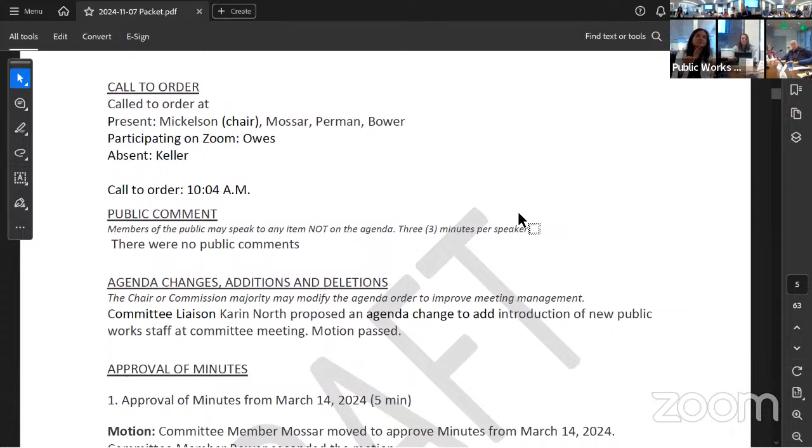Then we turn to the approval of minutes of the last meeting. You should have the minutes in front of you. Has everyone had a chance to look at them? Are there questions, comments, or do we need changes? Anna's scrolling to them on the screen too if you want to see them. Just for clarification, we're now doing action minutes, so they're very short and sweet. Any comments or needs for changes before we approve the minutes? May I have a motion to approve the minutes? Motion to approve the minutes. Second. A motion has been made and seconded. All in favor, please say aye. Aye. No opposed.

We turn to old business. Karin, we'll ask you to take that up. I think the next one we're trying to do for old business, we have none. So now we're on the next item.

Unless there was something else. New business - we need to elect the chair and vice chair.

We want to elect a chair. Does anyone wish to make a nomination? Does anyone wish to nominate someone? Can't think of anybody.

We don't know each other well yet, being new. I would ask our experienced members if they want to take a turn at being chair, and if they do, I'll nominate.

Sure, yeah, I'm interested in being chair. The floor is open, and I would like to nominate Catherine as chair. Do you need a second? Yeah. I'll be happy to second. Are there any other people who would like to volunteer or any other further nominations?

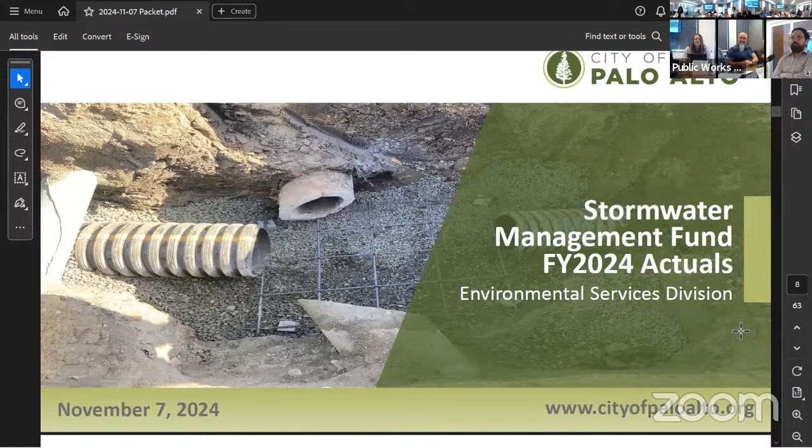All right, so we're now on to the fiscal year 2024 actual. Yes, and our new management analyst, relatively new, Kyle will be taking this on, and Michelle will be here to support and answer, stepping in. So the first thing is we've got the slide.

Many of you probably have already seen this, it's not new. This was included in the video that we asked you guys to watch. We wanted to just remind everybody about the process - it's a year-round process, budget development with many different components. We're doing a lot of coordination throughout the year, working with Michelle and many other people within our group to get it done. I wanted to see if you guys had any questions about budget development and how we do it here at the city.

Why is there community - is there public involvement or public comments? Do they go along that list, or how do you do that?

Yeah, definitely. So public engagement in the budget development process generally happens at the finance committee. Prior to the finance committee budget hearings, they usually do a budget open house, and they'll do an introduction at council. Then they'll start with the introduction at council of the budget, and then they'll have the finance committee budget hearings in April. At any committee meetings, members of the public are welcome to come make public comment on any item - that's really an engagement process with the community there.

Specifically on the budget, with the community and with the elected council - the finance committee is a council committee, made up of 3 elected members from the city council. That's the public's time to interact with the council members on the committee as well as staff, to ask any questions or provide any input.

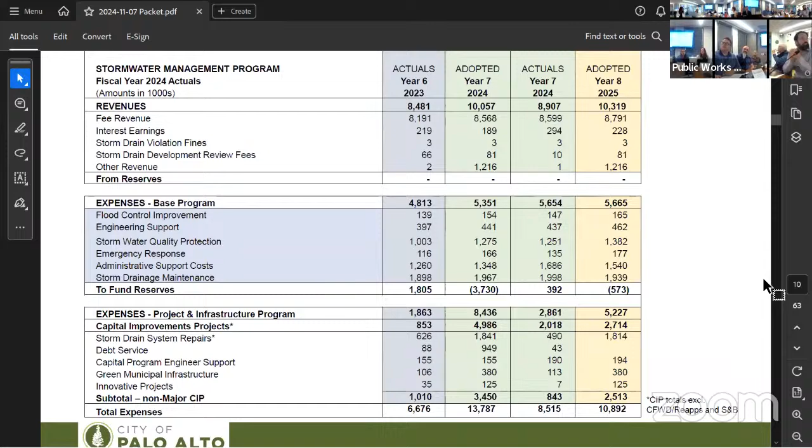As you can see, there are 4 columns. The first column is the 23 actuals, the second column is the 24 adopted budget, the next column is the 24 actuals, and then the 25 adopted budget. Right now, we're not going to go over 26 because that's going to come at a later meeting.

This program is broken out into 3 buckets: revenues, expenses which is the base program, and capital projects. The base program does not sunset - even when the ballot measure ends, this will continue. The capital projects also include the green municipal infrastructure, which is how it's listed, but you'll hear us refer to it as GSI. Essentially they're the same thing, just wanted to point that out.

When looking at the revenue numbers, one item I wanted to highlight is that we earned a little more interest, which is good. The money comes in, we put it in our account, and we earn interest on that money until we spend it. The other piece is storm drain development review fees. You can see we've only taken in, well this worksheet says $10,000, but I checked with the inspector and we've actually billed $78,000. I just wanted to make sure we had that item noted.

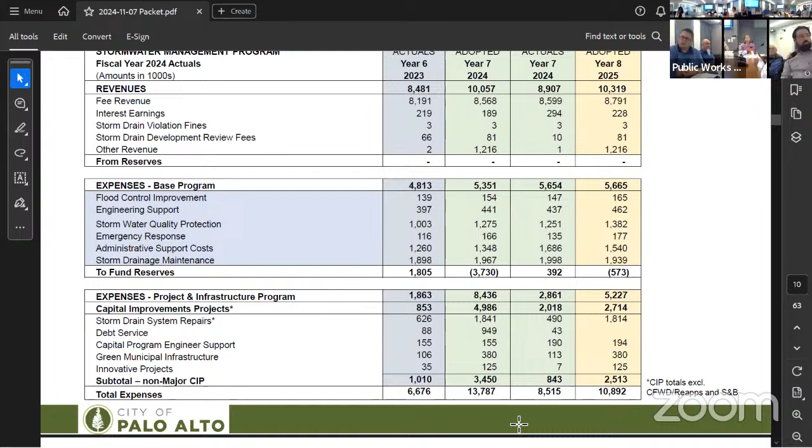That'll come, we do that later I think. Action required. Any other questions on the budget or the budget process before we move on?

I'm sorry about this, but the to fund reserves—those are big numbers with a few symbols—I just wanted a quick explanation. Of course. The way this ballot measure is structured, we are collecting revenues and have 13 large capital projects we have to complete. We kind of have to wait for the reserves to build up to budget those large projects. So you'll see some years where there's a good chunk going to the reserves so we can build up enough to budget in those capital projects.

And when you see it decrease, it's because we budgeted a project that year. So those first few years of this ballot measure, we didn't have any of the 13 capital projects budgeted because we hadn't built up the fund reserves to pay for them. The years you're seeing big amounts going in, we're getting ready to get enough to put a capital project in, and when you see it reduce, it's because we budgeted one of these large projects.

So you'll see a lot of those in the coming years, now that we're probably halfway-ish, maybe a third of the way into the ballot measure. We have the funds to start budgeting those 13 capital projects and start working on them. Thank you. Yeah, of course.

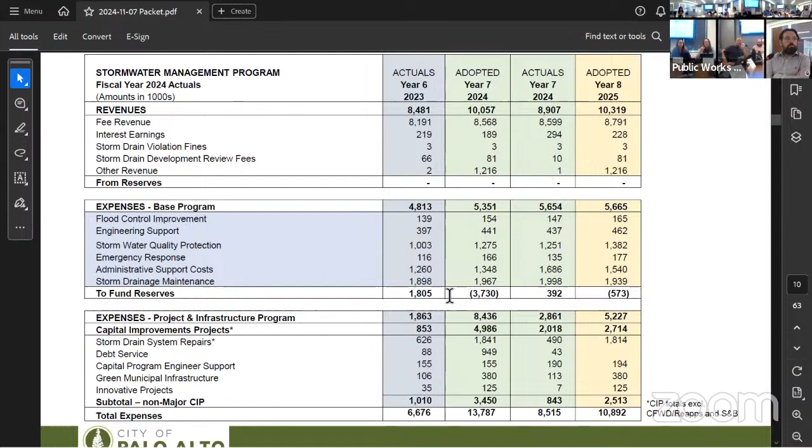So let's move on to trash. Is that okay? If you guys have any additional questions, I know we're on the spot on budget development, please feel free to send me or Kyle an email, and we're happy to answer any questions you have.

Good job, I mean seriously, that was so good. Thank you. So now we're going to have Brad Hunt. He's going to talk about trash.

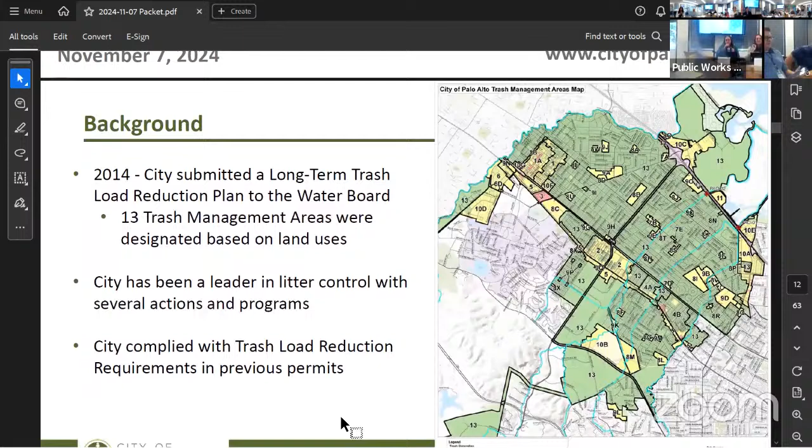Good afternoon, everyone. So today's presentation is going to be on the trash load reduction progress that we've made to date and the steps we're taking to meet our municipal regional permit requirements by June 2025.

To give a little background, especially for the new board members, some of you have seen this presentation before, but we'll provide background. The regional board established requirements for the city to follow to protect stormwater quality under our regulatory permit, the municipal regional permit, most recently approved in 2022. In 2014, we submitted a long-term trash load reduction plan to the water board, which has 13 trash management areas throughout the city, shown on this slide.

All those numbers represent the 13 different areas. The colors on the slide: green represents low trash load, yellow represents medium, red, as you can see, very little on there, represents high trash load, and purple, mostly Caltrans right of way, means very high trash load. So we're required to treat all of those areas and make sure we have very low trash production in the city.

We've been a leader throughout the Bay Area in litter control. We have several actions and programs implemented over the years, which I'll go over in another slide. Basically, we complied with all of our trash load reduction requirements in all the previous permits to date, meeting every trash load requirement and every percentage.

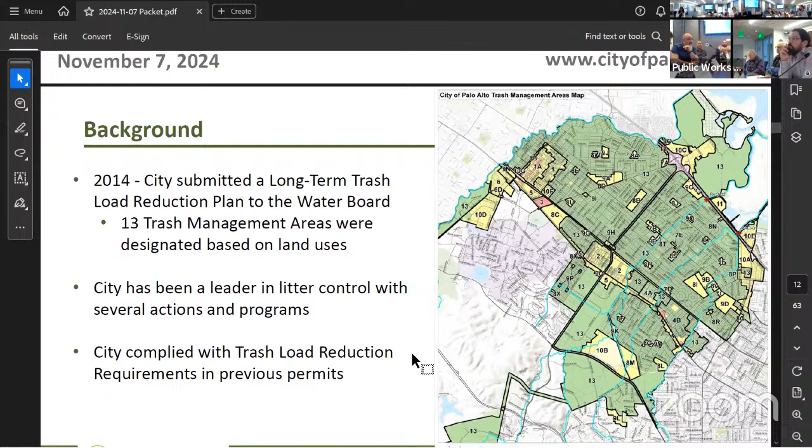So the reductions, sorry, next slide. Our trash reduction requirements in the new stormwater permit are based compared to a 2014 baseline. We had to achieve 90% by June 30th of 2023, which unfortunately we did not meet - we were at 75%. Part of the reason was that we lost some credit for the ordinances we passed, the single-use ban for bags and for EPS. We lost the credit for those, which dropped us below where we were.

What we have to do is achieve 100% by June 30th, 2025. To meet that requirement we submitted an updated long-term trash load reduction plan, which we did. When we did that, it was sent back to us saying we need to provide more detail on exactly what we're going to do to meet this. So we updated that plan, and one of the actions got us to 97%.

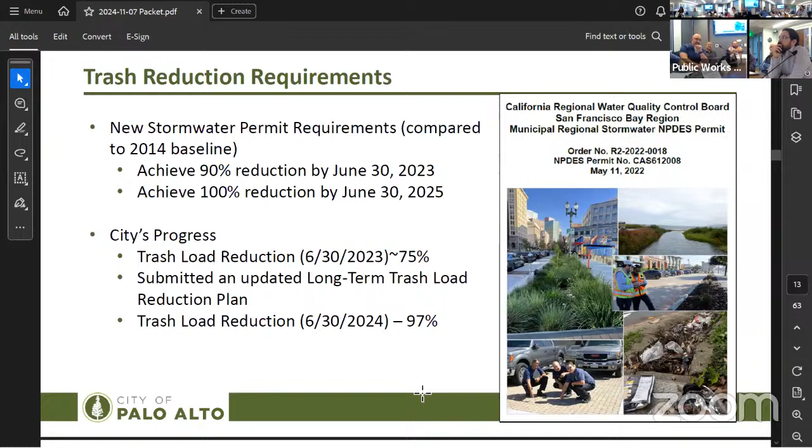Next slide, please. These are our ongoing trash control measures implemented so far: street sweeping throughout the city at various frequencies, on-land cleanups, trash container bin management - every business has a trash container they have to manage, and we inspect that to make sure they keep it clean. Storm drain inlet cleaning - Oscar's group does that, making sure they're cleaning those storm drains every year, getting trash before it gets into the creeks. We also have anti-littering and illegal dumping response, and public education outreach, plus covered load requirements.

Those are the ordinances I was talking about where we lost credit - that was about 10%, I believe, if I remember correctly. We also have trash booms, and we get partial credit for that because it's not technically full trash capture, which is how we get most of our credit. We get partial credit for those because it captures trash as it gets into the creek, but doesn't capture everything. That credit, unfortunately, is also going away at the end of this fiscal year, June 30th, 2025. What we also do is what's called trash assessments.

So we have people go out throughout the city and they assess sections of the city to determine what the trash generation rate is within that area. What we're seeing is that we typically get low or moderate trash generation. That's good because it means we're meeting a lot of requirements just by surveying and saying the city is clean. Those are point-in-time counts or surveys, and they vary year by year. But overall Palo Alto is really clean, and we have actions to take care of those other areas that aren't clean.

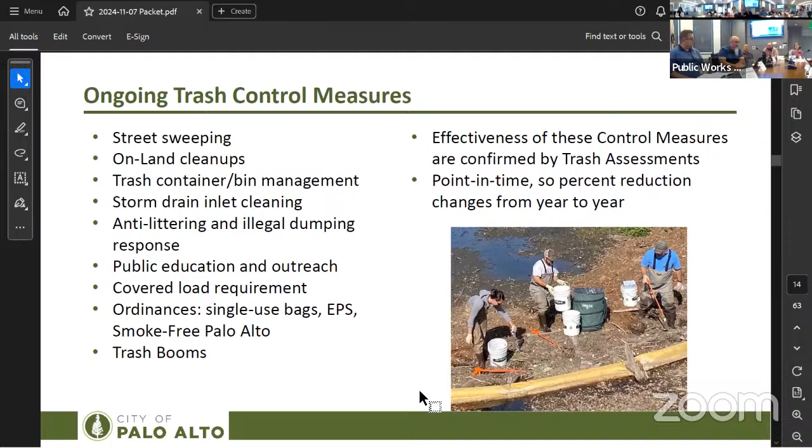Sorry, just one quick question. Could you talk a little bit more about the ordinances that impacted us, the single-use, EPS, and Smoke-Free?

The single-use ban was passed under the zero waste group. Basically, all single-use trash bags, grocery bags, and any type of retail bag were banned within the city—they were not allowed to be provided to anyone. That reduced trash impacts in the creeks. EPS is the same thing: any polystyrene packaging was banned from being sold in retail stores.

What does it mean that because of that ordinance, we lost credit? The regional water board decided that those ordinances were effective but were a one-time thing. They reduced trash overall, so that credit can't be applied going forward, since there's no more trash generated from those items anymore. We could pass an updated ban on something else, but that would also sunset at a certain point. So we did the good deed, got the credit, and now they're saying we have to do more to reduce trash from other sources.

So the ordinances are still in effect. I just want to make sure it's clear—it's just the credit that we get for trash reduction that has been removed.

So now there's street sweeping. You have a contract with street sweepers around here—they were by my house every other week picking up a lot of stuff. I think it would roll into this somehow. It does, we get credit for it. That's part of the trash reduction program. So those street sweepers are picking up trash along the curb and gutter.

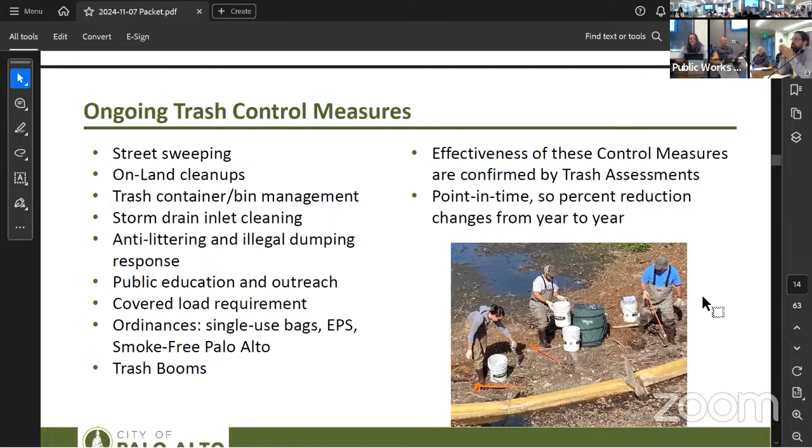With the construction going on, and those guys are horrible, street sweeping becomes almost more important. We have a construction inspector who inspects certain sites, and they're required to have a street sweeper go around during the day at a certain frequency to maintain that. You don't want nails on the street or anything. Yeah, exactly, right.

Bioretention here, that's it. Do we have some place to review the different percentages and credit? There are percentages, I don't have those off the top of my head, but all 3 of those devices right there give us 33% reduction throughout the city. We have that broken out on the spreadsheet that we have.

Some places in the system have bar screens that you have to go in and clean. Correct, we do have them on the pump stations and some creeks, we also have them right before the creek goes underneath the street on open channels. We capture all the trash. We have some photos of that.

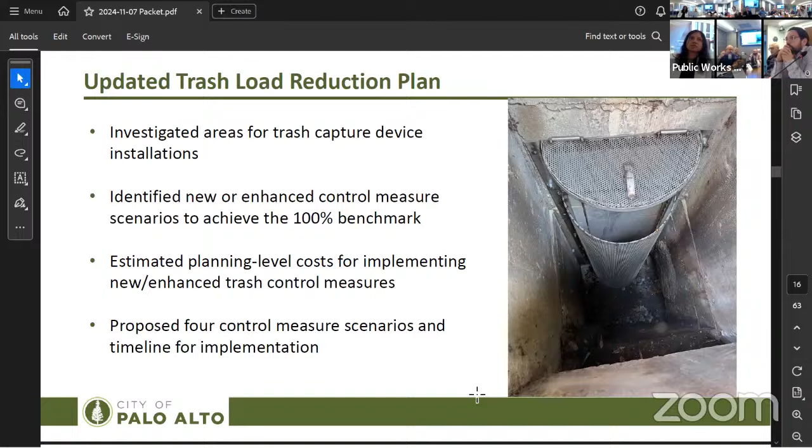So what we did was we looked throughout the city to determine where we could install those smaller trash capture devices. We looked at new ways we could enhance our current measures, like street sweeping, to see how we could achieve that 100% benchmark and maintain our current level of service. We estimated all of our planning costs for what this was going to cost us to do all these things, and we came up with 4 different scenarios.

The cost went down a little bit when we decided to include the trash assessments, then went back up when we decided to do all small devices, which would be a heavy load for someone to maintain, plus the private property inspections. So we decided to go with scenario D, because 49 devices isn't a lot to maintain and it's less costly. Private property inspections we can wrap into some of our current inspection programs so the cost goes down since we're not duplicating effort there, and then going with our normal trash assessments we're already doing throughout the city, those numbers reduce because we're actually doing the private property inspections.

What those private property inspections are is going out and inspecting private properties that actually have a storm drain system directly connected to our system. We need to make sure they're providing or implementing best management practices to reduce trash on those sites so their trash generation is at a low level. We inspected 45 of those this year and they all got A's, meaning they're low trash generating, so we got credit for that. That's how we got up from 75 to 97% reduction.

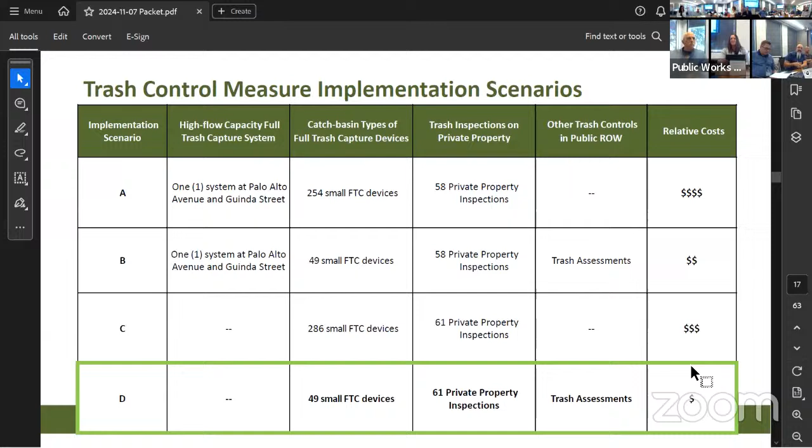So, a lot of them flow straight to the street, so that we can't do.

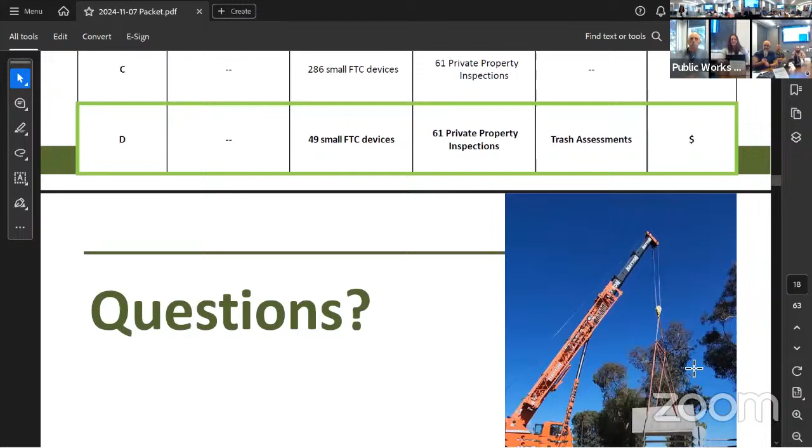So that's basically my presentation. We hit this one too. Oh, am I doing that right after? Are we rolling right into this? Yeah, you're rolling right into the stormwater.

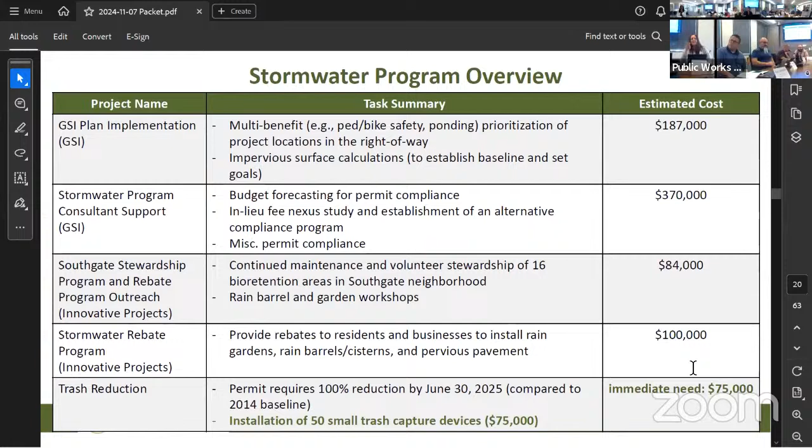So this is alluding to what we talked about earlier, talking about how we're going to meet compliance goals with an existing budget. And so we're trying to be strategic about how we can shift some money around. So now we're talking about fiscal year 25 budget.

Take it away - this is the overview of our stormwater program and the projects that we have within that program. As we talked about, GSI, Green Stormwater Plan Implementation, is about multi-benefit projects. In 2019, we submitted what's called a Green Stormwater Infrastructure Plan to the Water Board, which stated how we would increase GSI throughout the city, and there are various actions we were taking to implement that.

One action is that we created a GSI design handbook for CIP projects, capital improvement projects that we're rolling out. We're at the very final stages of getting that done finally, and it's about to go to design, and then we can provide that to city staff to use for all our CIP projects.

Another one is that we're integrating GSI into departmental work plans. We're looking at city projects to also make sure we include it in, and we're working on prioritizing GSI, especially in the right-of-way projects, and coordinating with the other departments on that.

Impervious surface calculation is another project we have under that plan implementation. We're going to basically survey all the impervious area within the city and determine where the best areas are to implement GSI, to install green stormwater infrastructure to treat those areas.

Stormwater program consultant support also falls under this GSI category, and what we need support for is to help forecast the long-term budget. For the rest of this permit through 2027, one thing we need to do for private projects is conduct an in-lieu fee nexus study, because they're having trouble meeting some of the requirements. So they need a way that they can pay an in-lieu fee so that we can use that money to install GSI in other parts of the city to treat stormwater.

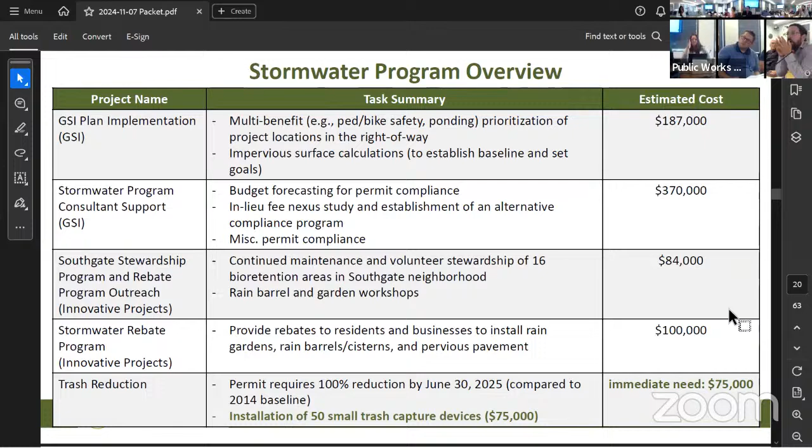So we're going to request an immediate need for a certain amount of money. Just so you know, the estimated cost is not for fiscal year 25 specifically, that's the contracting need, it will go over multiple years. So we're just going to show you what we need for the current fiscal year 25.

I just have one comment, I think that this kind of program would be important to people. I don't know enough, I don't think a lot of people living here understand this is going on. And we need more PR or whatever on this kind of program, because it really makes a difference to those of us living in the city, and I don't think there's a lot of people that know, but personally...

That's why we do a lot of PR, but you guys being the ambassadors is going to help us, because boots on the ground talking to folks, the area in Southgate has gotten a lot of publicity because the residents are involved, and that helps. So that's where you guys can assist us. But this is our budget needs, Kyle.

Yeah, so hopefully this will be pretty quick. As Brad said, in order to meet our permit requirement, we need to install 50 new trash capture devices. And we've identified some budget from fiscal year 25 that we'd like to use in order to install those 50 trash capture devices. So that's one of the action items we're going to be asking the committee to take, is to look at this and go ahead and sign off on it.

And it kind of goes back to when we were looking at the fiscal year 24 budgets. If you remember, we identified that the GSI budget and the innovative project budget are two areas where we're spending less. And so we're hoping to use budget from the GSI budget category and the innovative projects to install these 50 trash capture devices.

Are we done with that action item now? Yes. Okay, excellent. Now we're gonna move to the next item. Next item is number 8, staff overview of winter preparedness. Is that correct? Yes. So Mike has a lot of slides because it's a lot of pictures. It's nice for you guys to see.

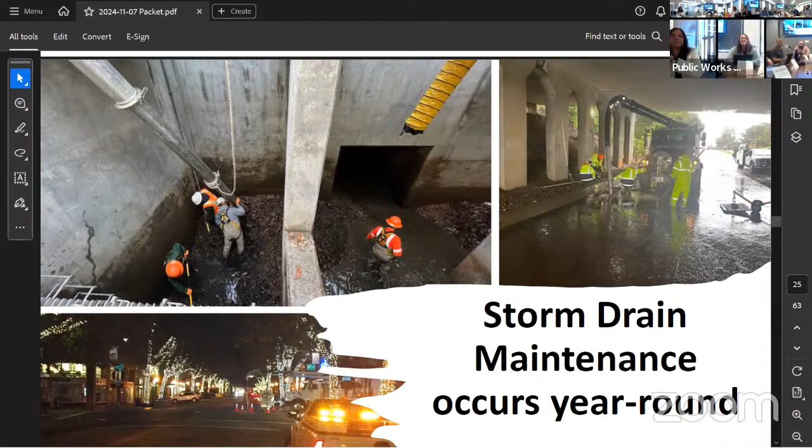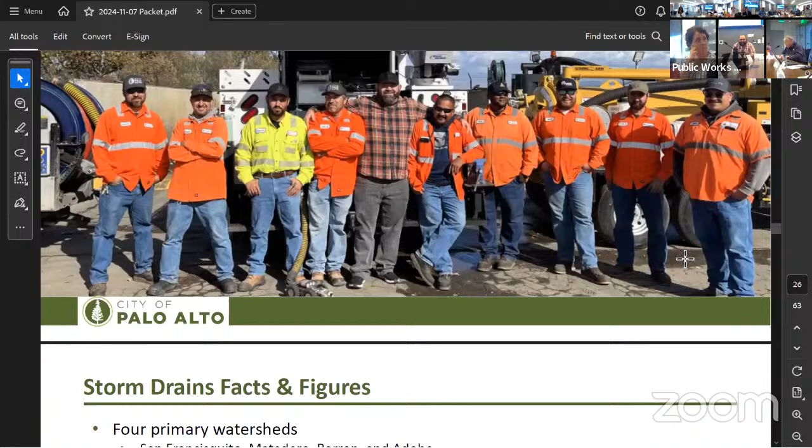So we're gonna talk about what public services does to prepare for winter. We actually prepare for winter all year long, and we should be preparing for winter before winter. That's actually when we get most of our work done. That's why I always laugh when people say, what do you do to prepare for winter? And the thing is, during winter...

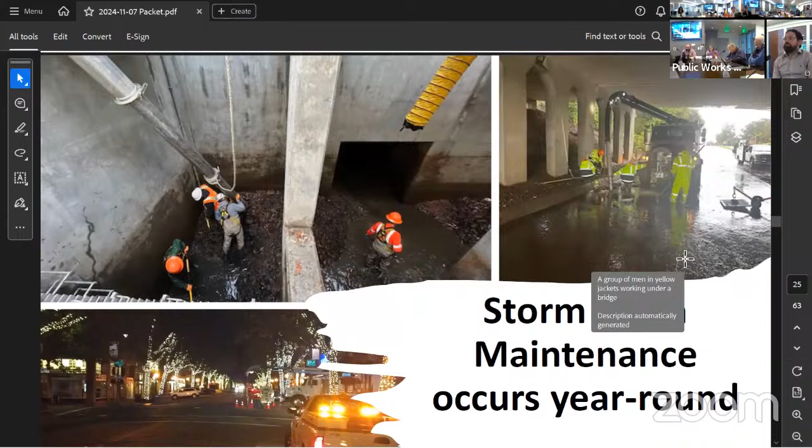This is most of our team that works on what you guys are providing oversight on. The team actually gets larger because when we need to, we pull from other crews. During the flood 2 years ago, we actually pulled from everywhere in the city - every employee from our public works team, public services team, public works department, utilities department, parks department, everywhere, plus contractors. We had an army of people out. So we have a lot of resources at our disposal.

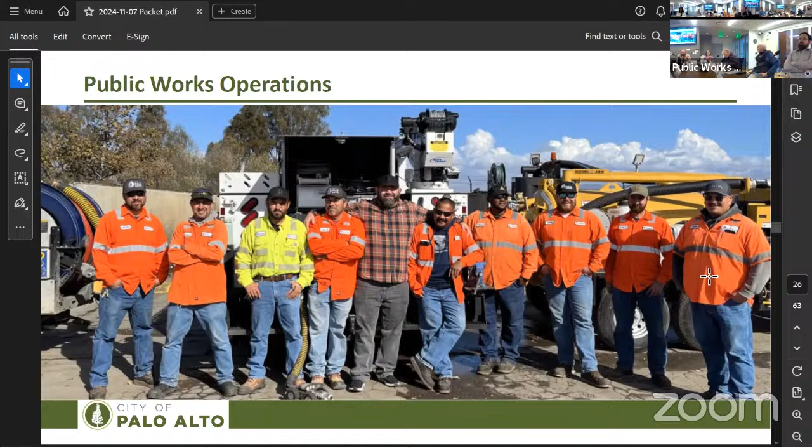Some storm drain facts and figures for the new people: we have 4 primary watersheds, listed there. Many people don't realize storm drains are separate from sanitary sewers. The stormwater actually flows to the creeks and the San Francisco Bay without treatment. We have 107 miles of underground pipelines, 76 outfalls, 4,662 catch basins - which we all inspect, maintain, repair, and work on - 1,592 manholes, 9 stormwater pump stations with two new ones coming, 2 new trench drains related to traffic calming projects, and probably over 20 green stormwater infrastructure sites.

What is a traffic calming project? What does that mean? Oh, those are the things that a lot of people tend to not like - instead of going straight through a four-way intersection, you have to go around something in the middle. They're sort of roundabouts, but not really roundabouts, and they also have stop signs, so they're not really roundabouts either. They're supposed to be traffic calming. I don't know if they're stress calming.

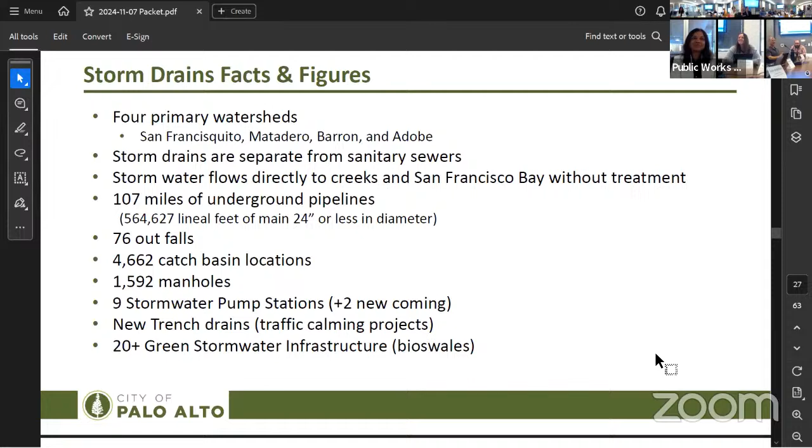Sometimes you see what I mean, at the intersection, not just the intersection, but at the ramps where they bulb out. Yeah, there's a bulb out. Okay, all right, next slide, you got it already?

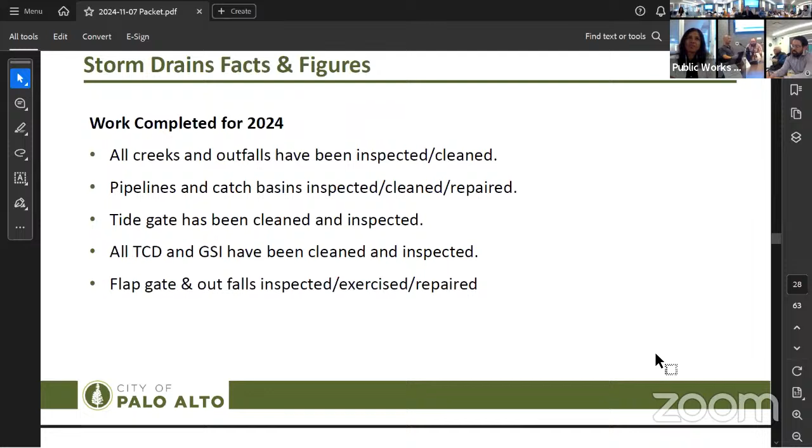Here's some of the general work we've already completed for the year. All the creeks and outfalls have been inspected and cleaned. The pipelines and catch basins have been cleaned, inspected and repaired as well. Our tide gate has been cleaned and inspected. GSI has been looked at and inspected, and the flap gates and outfalls too - it's important to not just inspect them but exercise them to make sure they're working, and repair them as necessary. There are nine pump stations, with two more coming.

Are these all manually inspected, or are there some cameras or other tech used? Manual. Any plans to automate some of these, like putting cameras maybe even inside the drains to get some data? That would involve some of the logistics of trying to put in infrastructure. We have some infrastructure to do creek monitoring and things like that, but to try and put in permanent infrastructure to monitor how the storm drains are functioning...

We do it within the sewage treatment plant, and we have 24/7 operations, a lot for maintaining it, running lines, always troubleshooting. Right now it's seasonal - his team typically goes out and inspects, and they know the hotspot areas. The two pump stations Michelle's working on will also help with those areas where flooding happens, so we have a good sense of where we have issues in the city. With construction going on, big buildings and all that, they end up with their own pump stations inside the building, and that's what I'm seeing - they need to maintain them, which they don't do, so the system keeps getting more complex.

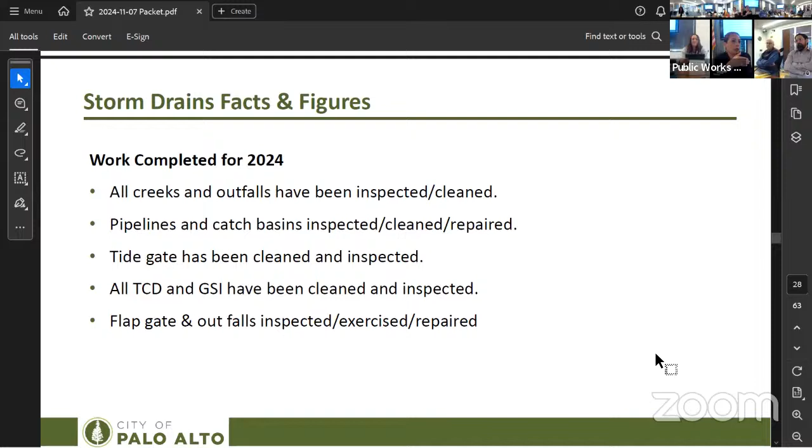That's private property - anything in private development, private property, is privately maintained by whoever, whether a resident or a campus. It's not something we would maintain, though it flows into our system. What we have is barriers and separations between what can and cannot flow into our system. Ideally, we'd have catch basins at the street that keep our flows captured, and then we try to separate any private development independent, outside of that.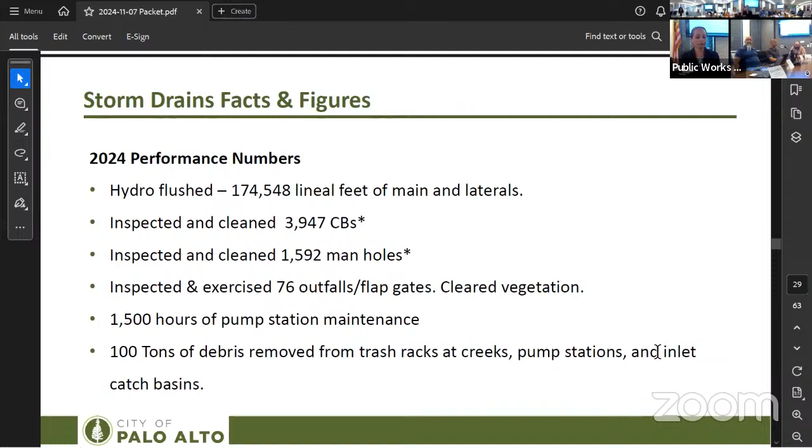Here's some actual performance numbers for the year. We've hydro flushed 175,000 linear feet of storm drain line and laterals. We've inspected close to 4,000 catch basins - there's an asterisk there because we don't just inspect and clean them one time, we go back and do it again, sometimes two to three times. As winter approaches, we'll go back and do it again.

There's a number of outfalls and flap gates that we've inspected and exercised, 76 of them. We spent about 1,500 hours of maintenance on our pump stations, and we probably pulled out around 100 tons of debris just from our trash racks at the creeks, pump stations, and catch basins. That's an approximation - we measure it by truckloads since we have to pay for it, so there's an accounting, but it's not an exact number.

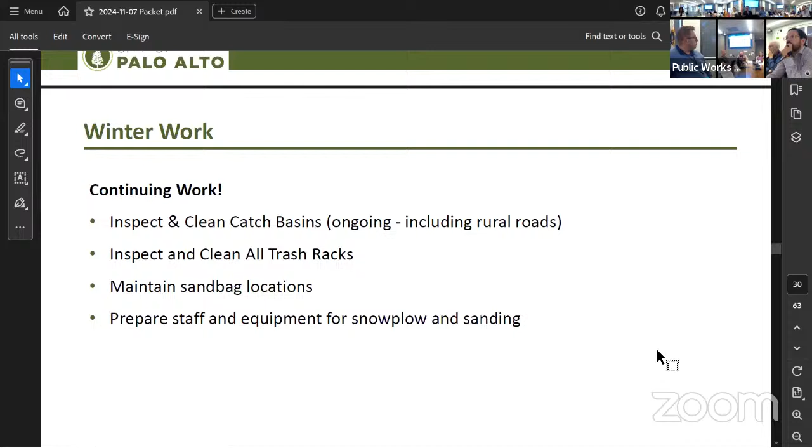Next slide, please. As winter approaches, we're going to continue our work inspecting and cleaning the same catch basins, focusing more on the rural roads up Upper Page Mill, and keep cleaning and inspecting the trash racks. November 15th is approaching, so that's when we set out our sandbag station - we just received our delivery of sandbags and sand, and we'll be maintaining those stations. We also prepare staff and equipment for snow plow and sanding because it does snow up Upper Page Mill, like we did last year.

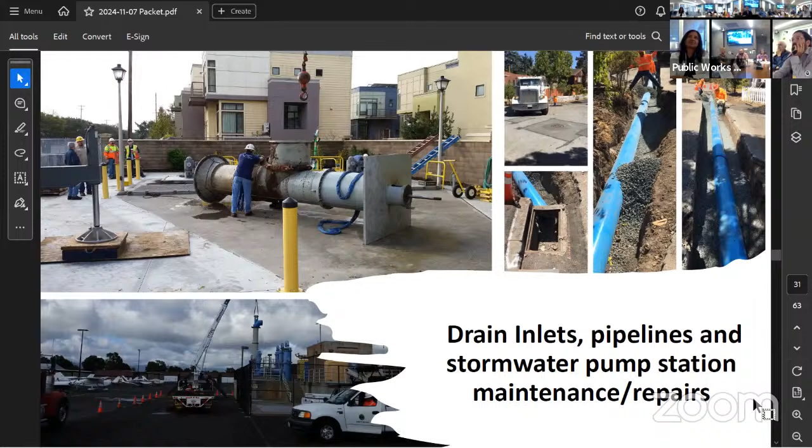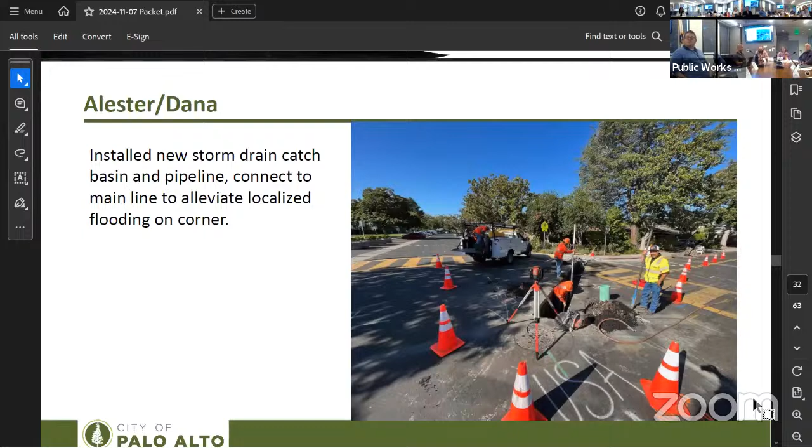Next slide. I want to share some pictures of work that's been going on in the streets. At Alester and Dana, Oscar's crew installed in-house a new storm drain catch basin, at the recommendation of Public Works Engineering, to help alleviate some of the local flooding that happened on that corner two years ago. Over at Palo Alto Avenue and Seneca, the 2022 flood sheared off the flap gate and damaged 10 feet of pipeline there. We had to demo the damaged pipeline and install a new pipeline and new flap gate, and after that was done, we had to restore the vegetation on the hillside with soil and native vegetation.

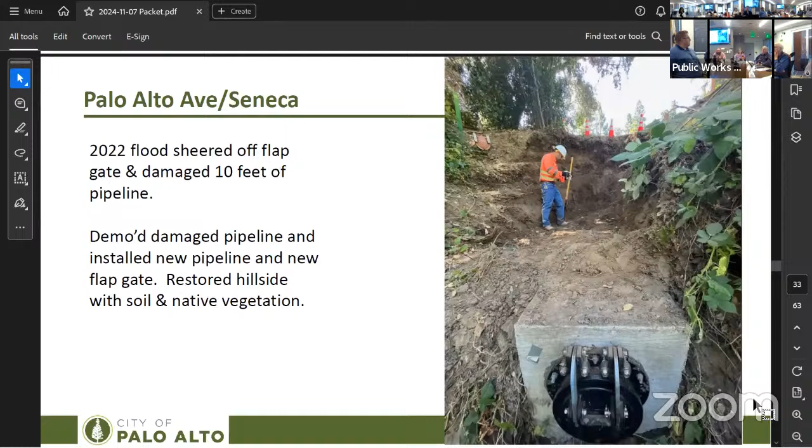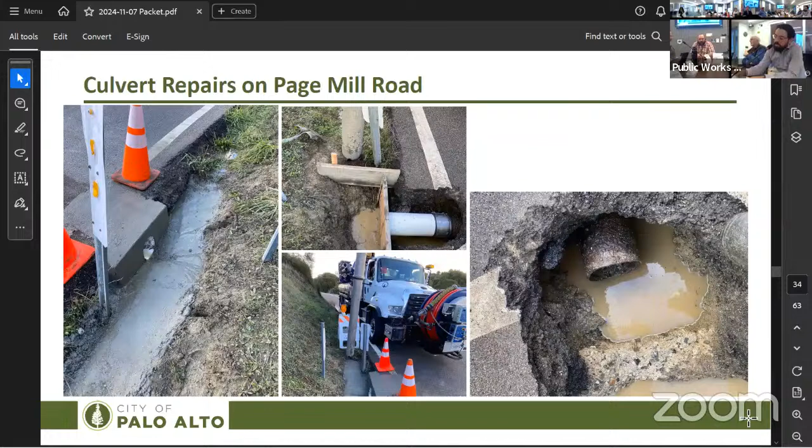Okay, this slide shows some of the culvert repairs that we've done on Upper Page Mill Road. You recognize what this location is? Underpass.

El Camino underpass. Remember when it flooded and we had to close it down with all the mud and debris? Yeah, well, that's actually not our jurisdiction, but to keep Palo Alto moving, we had to step in. Just a little aside, I'll be real quick.

It used to be a 20-year design life, you know, you use a 20-year storm and all that to design runoff. We're starting to see 100-year storms. Yeah, right. I just wonder if that criteria has changed, because the effect is, you're still dealing with a 20-year storm and it always is bigger than that. Just out of curiosity.

So what's the question? Is it design, that's design, for Michelle. You know, a 20-year storm or 50-year storm, did we start to change that criteria? That's what I'm asking. No, we have not changed the criteria. The criteria has been the 10-year storm. You're at a 10-year storm. So we're trying, with the 13 CIPs, just to meet the 10-year storm.

We should have it every year, but we're trying to provide some level of redundancy. So, you'll see in another slide.

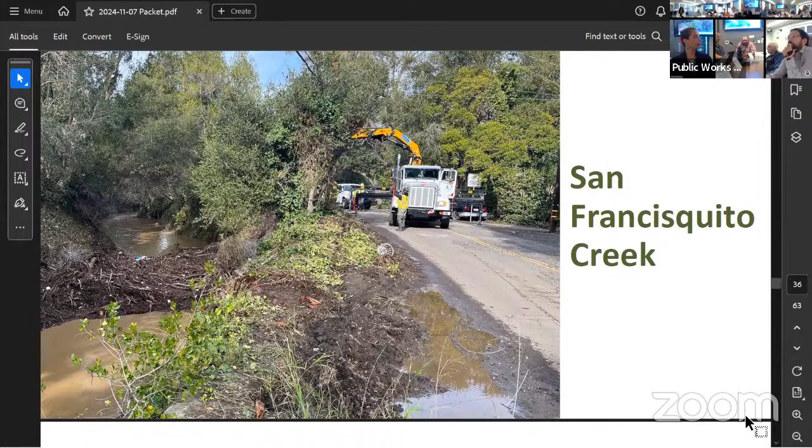Okay, so this picture shows how much debris collects in some areas of the creeks. This particular area was very difficult to get to because of the low hanging utility lines above. We didn't have the equipment to reach that and pull it out, and we couldn't even rent the equipment. So we had to request assistance from Valley Water. They have a very specialized truck specifically designed to do that. So we do rely on our partner agencies to help us. They're a tremendous help.

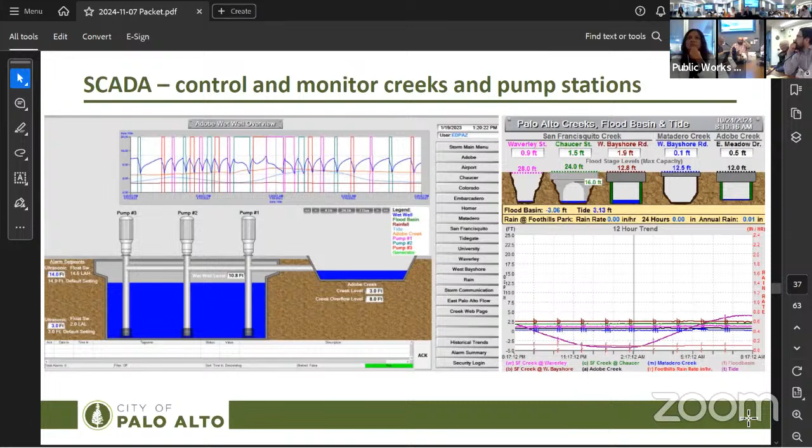Also, I know committee members are aware this is available on the city website. You all know — the one on the right is actually from the city website.

Next slide, please. And just this past year, we made some improvements at Pope Chaucer Bridge by installing a new high resolution pan tilt zoom video camera to monitor the bridge, the activity there, water levels, and how much debris is coming down the creek.

We also added new emergency lighting so we could see the debris flow coming toward the bridge, because when we need to pick debris off the bridge, the person operating the excavator has to be able to time and see the debris floating down to pick it up.

It was funny because 2 years ago when it was happening, all the community members were out there watching. It was like watching a little kid play a video game.

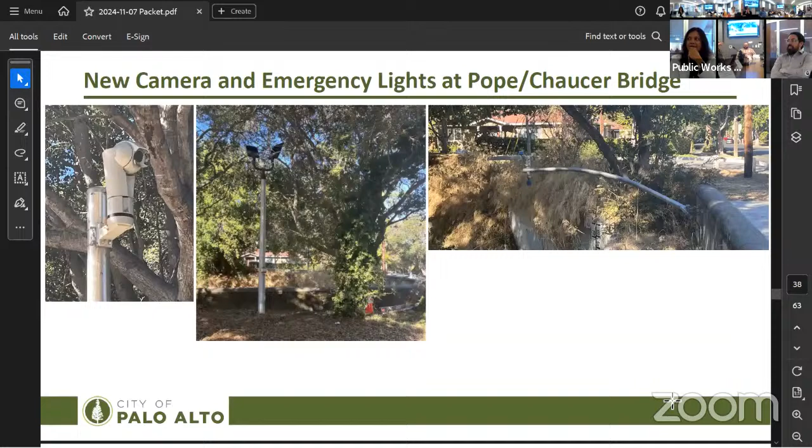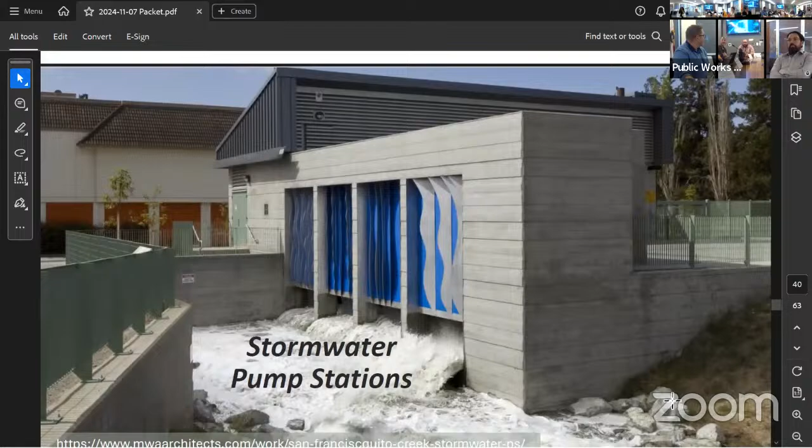There's also, the picture on the — two slides previous — the one on the far right is actually the sensor over the bridge that measures the water level, but there's also a light there that we put so we could light up the vertical height scale that measures the water level you see.

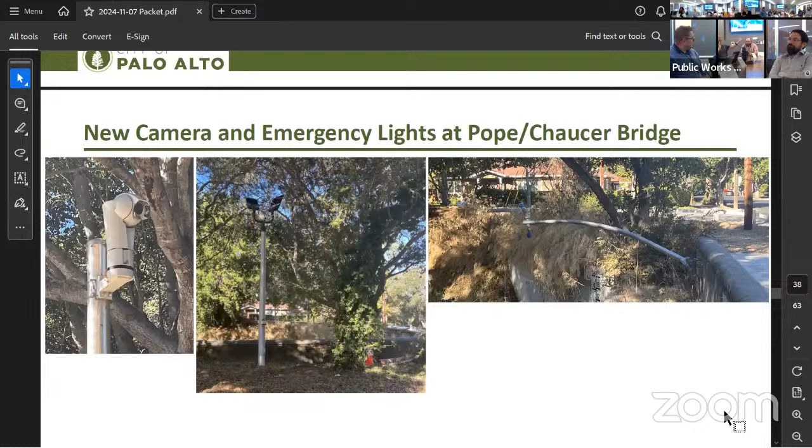We actually had to add another one. The vertical height scale that was there before was on the Palo Alto side, which the Menlo Park side could read. But when we put the camera in, they wouldn't allow us to put it on the Menlo Park side, so we had to put it on the Palo Alto side, which meant I had to put another scale on the opposite side of the camera — a system of mirrors.

We knew how critical people would be, so when we put the other height scale, we made sure we lined it up with the other one. If it was an inch off, we would hear about it. All right, next slide.

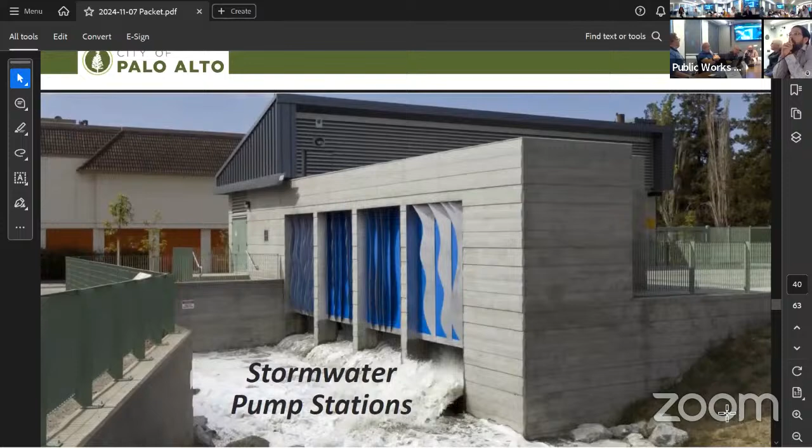Before you leave the slide, I wanted to go back to the comment about making something automated. We have a great relationship with Menlo Park. It's not that they wouldn't let us put a camera on their side, but the dark fiber that serves stormwater is separate from the rest of the fiber that serves the community, and it's connected on this side of the creek. So we had to extend the fiber to this area to get that feedback, and we had to keep it on the Palo Alto side because that way we control it and monitor it. We don't prevent East Palo Alto or Menlo Park from doing anything else. We also pulled the power from our side, so it's more convenient to put it on our side.

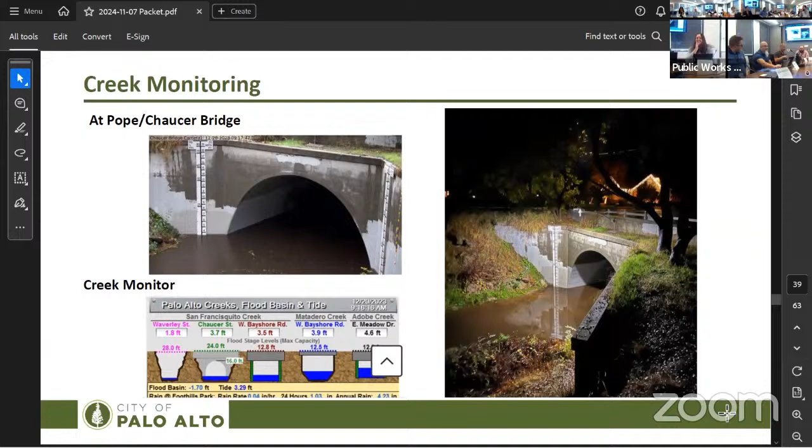The next few pictures are just a few photos of our pump stations and the work going on there, cleaning up all the leaves, sediment, and trash.

Where is this pump station? It's the San Francisquito Creek Pump Station, on East Bayshore, borderline with East Palo Alto.

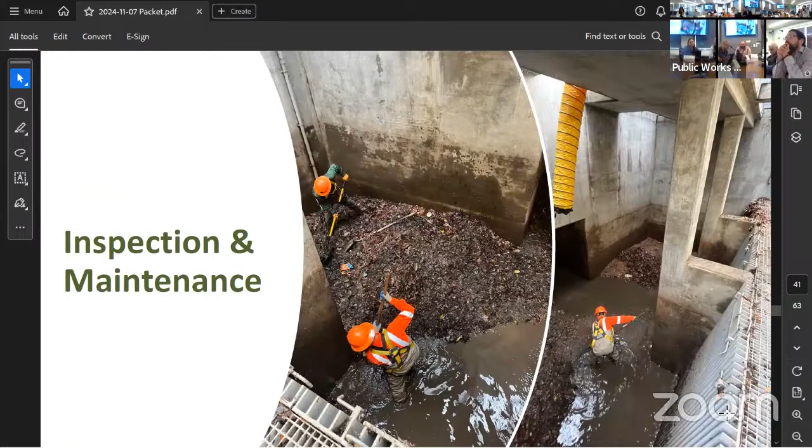I'm just curious. So these are confined spaces, so we have to do confined space training and proper setup.

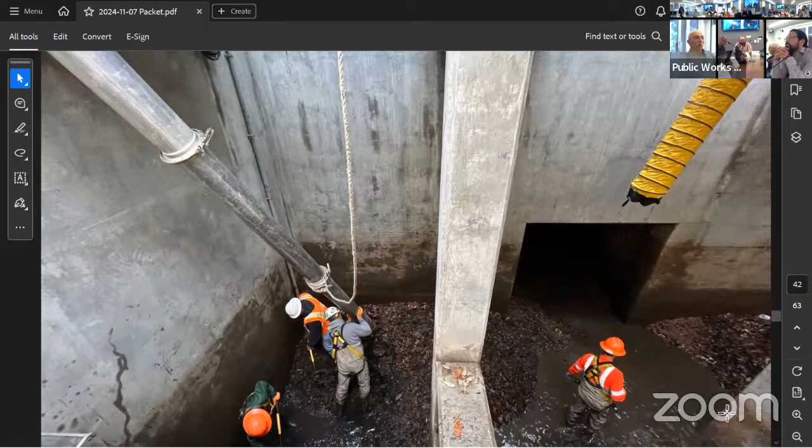If you guys want to visit that site, let me know. There's a few pump stations that Oscar could take you around and show you, including a trash capture site, if you want to see that.

Someone asked earlier about cleaning manually. Yes, but you have to sign something saying if you fall in, it's your fault.

It is cleaned manually, but we do have some specialized heavy equipment to help us. You can see that big metal pipe there with the pipe extensions on it. That's actually a big vacuum, very powerful. It can suck up rocks, it can suck up humans. That's why you have to be careful.

Well, it's about your weight. That's what I'm saying, it's dangerous, you have to be very careful. He prevented me from asking a question. This tool is very valuable to us.

Next slide, some more pictures of trash racks, inspections, and cleaning. This is some of the manual work at the creeks. We have 10 other creeks and 4 channels with trash racks, in addition to those 9 pump stations.

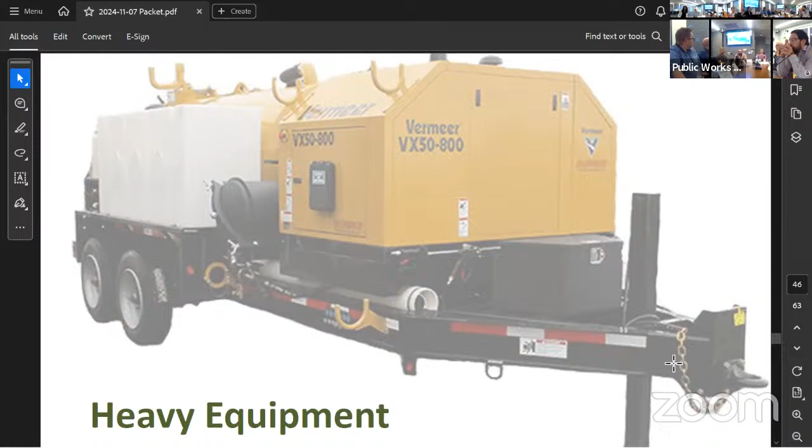Next slide, and this is just to show how valuable the equipment is that we need. This is that Vector truck I talked about, that very powerful vacuum. It also has a hydro flusher on it, so we can clear lines if there's a blockage.

Oh, sorry, the one that says Vermeer - do we own this? No, okay, somebody changed the spelling on my slide. Anyway, that's the Vector truck, we own that. That's a very useful tool.

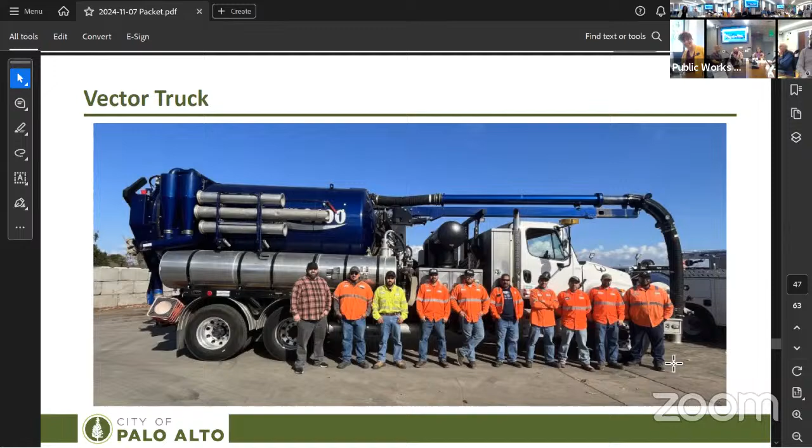What we have found useful, since the 2022 flood, is renting an excavator and leaving it parked at the Pope Chaucer Bridge so we can respond faster. We do have a small excavator ourselves, but it's too small and doesn't have enough reach to get down as far as we want. So we rent one and stage it at Pope Chaucer Bridge, usually around November. It should be coming soon, and it saves us a lot of response time because we just park it there.

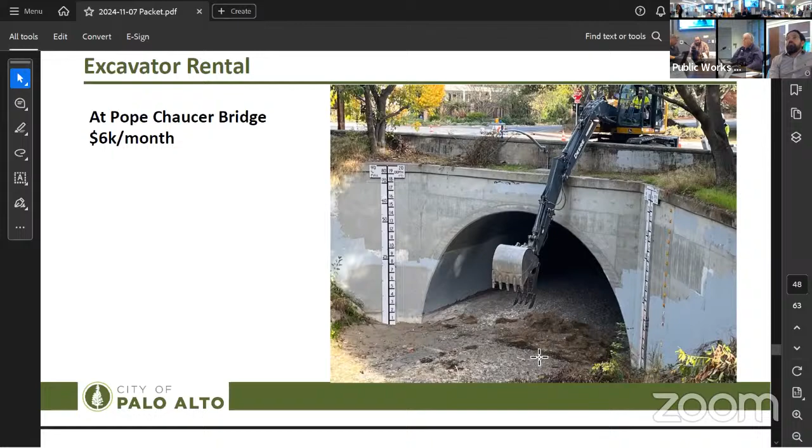This is something we started using about a year ago and are finding very useful. It's also a vacuum truck, but it's a smaller unit on a trailer, so it gives us more flexibility and portability, and extra capacity to do more cleaning, and do it faster. It also allows us to get into smaller areas like parking garages.

And you can respond fast with it too. This is costing us $5,000 a month to rent, and Oscar has found that it's making his operation so efficient that we're actually proposing to buy one.

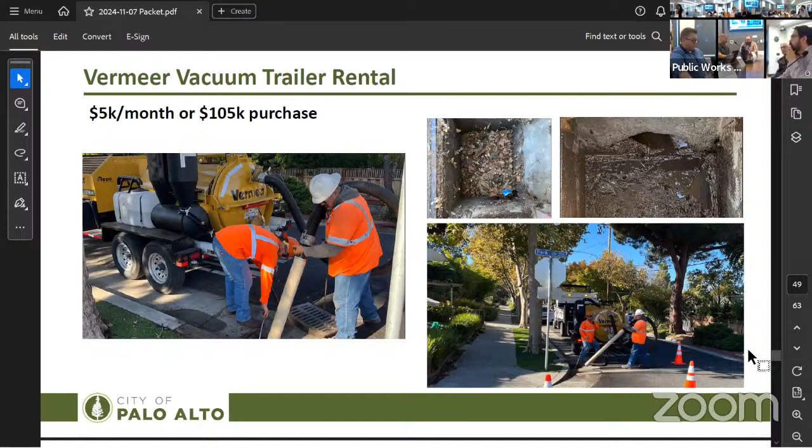Okay, that's just like a sump pump. Yeah, it's like that big vacuum, but smaller, on a trailer. So instead of having one crew operate that Vector truck, he can set out another crew with this one.

That big truck is hard to maneuver around tight streets, so the other thing we rent seasonally during the winter months is a trash pump that we use to drain wet wells at the pump stations when the pumps are off for maintenance, or when we need to supplement draining the wet well if a pump is down. We can also use it for localized flooding, where we pump back to the creek if we're close enough.

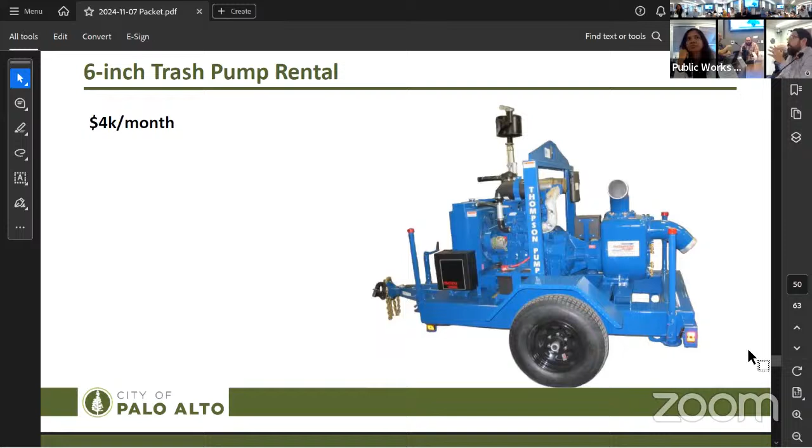Sorry, random heavy equipment question: is that thing strong enough to take a lot of debris? Mostly just water. The other ones will pick up water and debris, yes. Okay, just making sure.

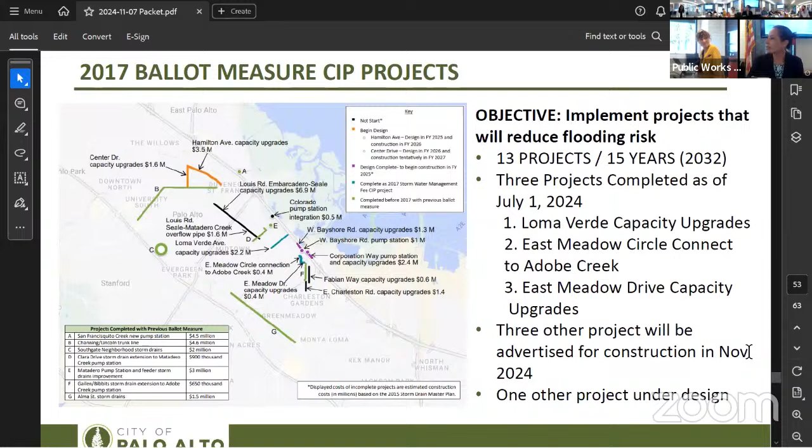First slide, thank you. Is there a way you can zoom into this one, maybe make it a little bigger? I wanted to focus on this if you guys have time. What we started to create is a map that shows all the big projects. There are some projects that Oscar and Mike's team have built that aren't shown here—the ones we went over earlier today—and that's just a small fraction of what they've built.

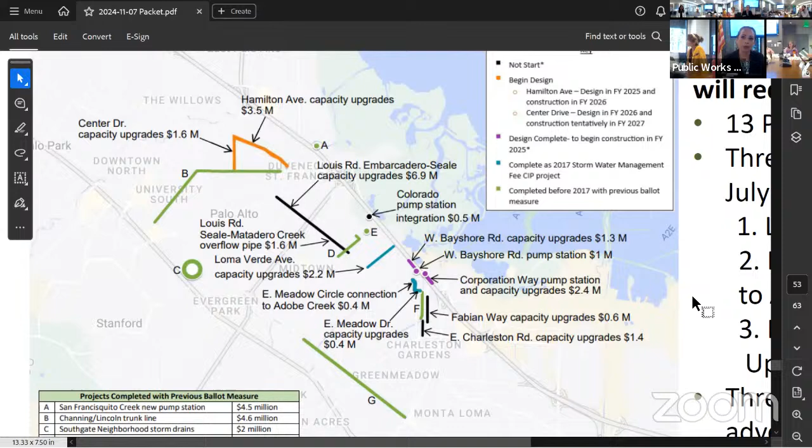These projects highlight, first of all, the first 7 projects that were built with the 2006 ballot measure—remember the debt services we talked about? That built 7 projects, A through G. The last project, as Michelle mentioned previously, was the Matadero Creek Pump Station, project number E in this list.

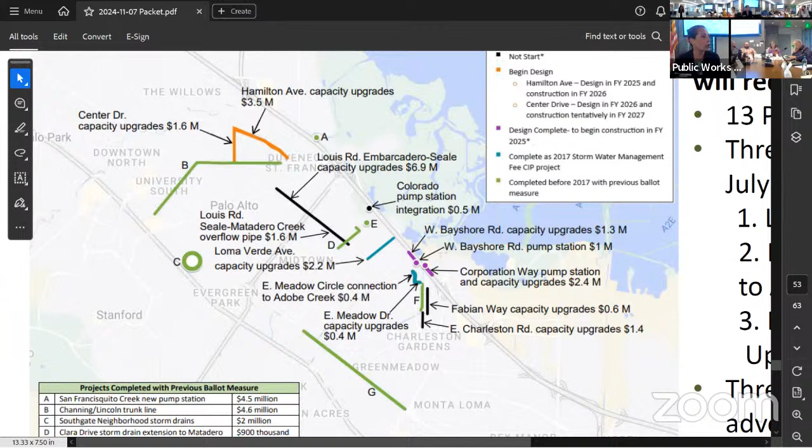That one was one of the biggest ones. We completed that project, I want to say in 2018, beginning of 2019, even though the new ballot measure had already been approved in 2017—we went 2 more years past that to finish the pump station. There was a field trip to the pump station.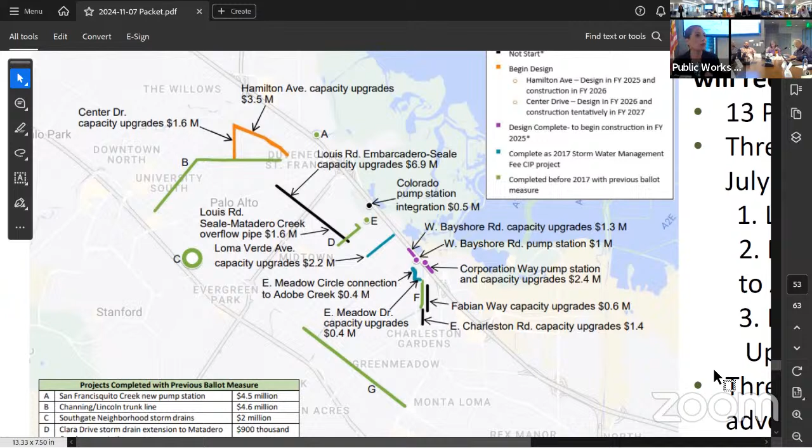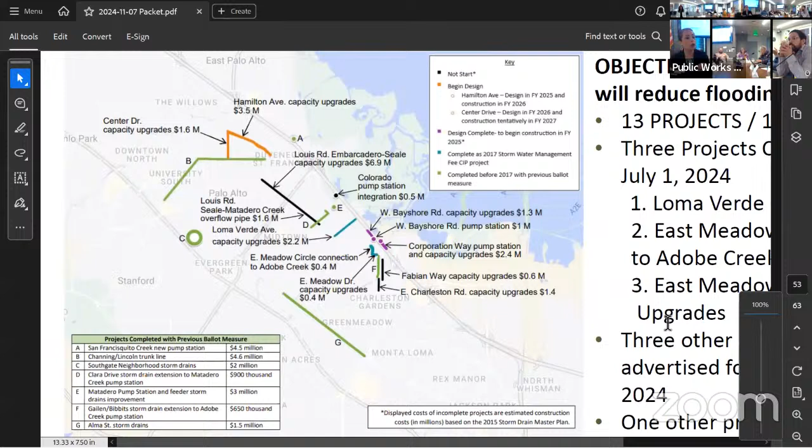A single pump, right? No, it's 300 and it can pump up to 375 CFS. We've got 3 main pumps that are alternating, each one triggers, and then we have a small one for redundancy.

It's similar in size to the pump stations Mike shared on his slides—that was the San Francisquito Creek Pump Station, near East Bayshore, near a school in that area by the new creek widening section. Matadero is on the other side of the city, near Colorado and Loma Verde. You'll see it on this slide.

So what's next year—thank you. What I wanted to highlight on this slide is the line work shown in green; those are the projects that are being completed.

The projects that we have recently completed, you'll see almost in teal color. The Loma Verde capacity upgrades was the first project that Vicky and my team oversaw. That project was also completed in 2019. It replaced about 1,500 linear feet of pipe, upsizing the capacity.

We needed the Matadero Creek Pump Station to be in place before we could build projects upstream. We have to have a bigger pump to put more water through. So Loma Verde was the first project.

She also recently completed two smaller projects shown here, East Meadow Circle and East Meadow Drive. I'll touch back on those later in a couple slides, and you'll see more photos. One of them was done in 2022, so those projects were completed.

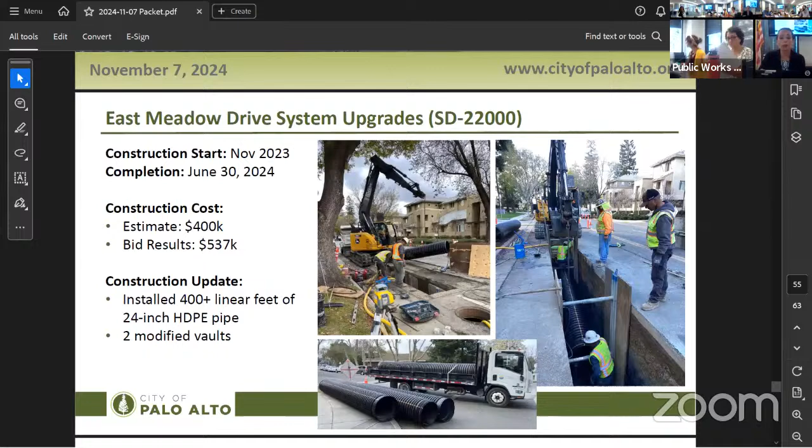So I wanted to give a recap. This is East Meadow Drive, the project I mentioned earlier that Ricky completed. This project is complete, done in June of this year. You can see it took from November 2023 to June to complete.

The project was estimated to cost $400,000. The bid results came in with the lowest at $537,000. So you can see how, for example, on Kyle's budget, sometimes we've got extra money but only spent this much, and some of the money comes from the lowest bids. This summarizes the type of work performed.

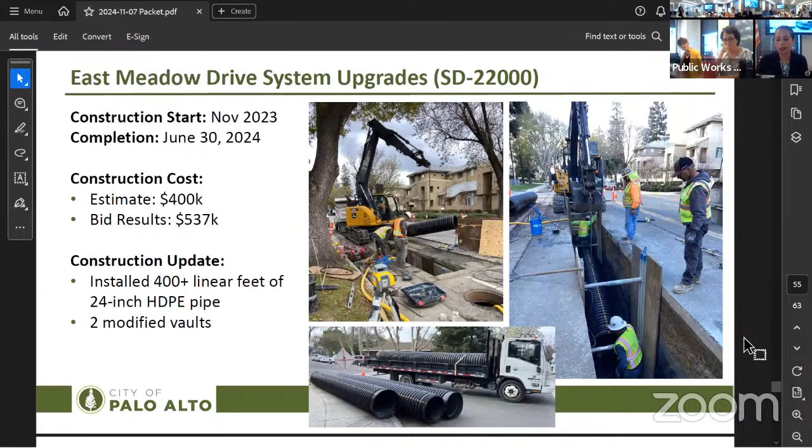Modified vaults. As we upsize our connections, our manholes are not big enough, so we have to build in and actually convert manholes into vaults to deal with the capacity.

East Meadow Circle. As we talked about GSI, green stormwater infrastructure, or green municipal infrastructure, these are measures we take into effect. The photo in the middle shows that we try to implement natural measures that capture the first flush—any small rain amount early on that might carry grease, oil, cigarette butts, anything tossed into the gutter that the street sweeper doesn't catch—before it goes into our inlets, we try to capture it here.

Where feasible, my group looks into implementing some of the GSI. It's one of the smaller buckets in capital, but it's another GSI project. Some of the GSI we were asking for, along with the other projects Brad spoke about, this one also covered this project. For example, this one was $96,000 for the GSI, while the work involved with the actual CIP was $440,000. We estimated close to that, so it was close to our estimate.

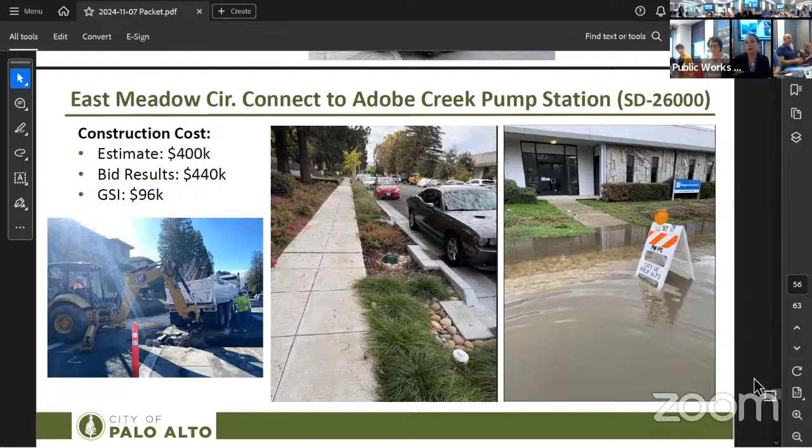Next slide, the storm drain rehab. As I mentioned previously, in the past we looked at doing CIP projects and rehab projects separately. We're trying something different now, doing rehab work along with CIP work at the same time. So on this project, for example, we try to move our construction crews from one end to the other, fixing 6-7 locations throughout the city—places where we could replace lines in place, upsize them if necessary, and also deal with impacts from the flooding event that occurred.

Let's just add where feasible, try to incorporate with a primary focus. For example, last winter was predicted to be a strong El Nino, and we had the area near Louisa Court and Newell Place that was flooded. So one of the measures we implemented this year, ahead of the CIP, was to install flap gates at the main line so the water wouldn't back up into the private residences.

So we had a few little projects that we did throughout the city along with the CIP projects.

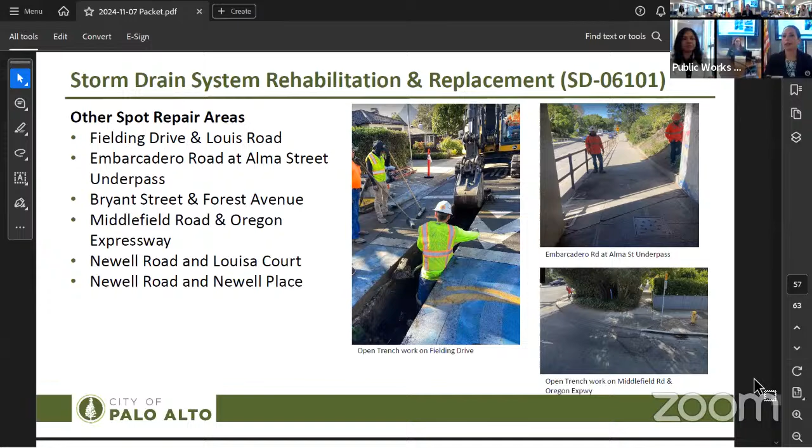Next slide. So then, as I mentioned, the other project is the one Rajiv's been working on. This has been taking us a long time to get here. This involves the two small pump stations that Mike mentioned. We are proposing to install two small pump stations at both sides of the new Ped Bike Bridge project.

Both pump stations will be located within private property. They're significantly small in comparison to San Francisquito Creek or Matadero. The wet well itself is probably 14 by 15 by 20 feet deep, with a capacity of 25 cubic feet per second.

For comparison, Matadero is 375 cubic feet per second, so this is a relatively small pump station.

What we've been hung up on a little bit on this project is, one, we had to secure easements from a private property owner. That took a long time because there was no incentive for the private property owner to give us easements.

The reason we wanted to implement these features within the private property is, as Mike alluded to earlier, a lot of times we're doing this work at midnight. A lot of times we've got to clean equipment. That photo he shows is during the daytime, but a lot of times during emergencies, power outages, and rain events, it's at night. For staff safety, we put vaults outside of the roadway when possible—let's not put them in the public right of way if we can avoid it.

So we're building these two small pump stations on private property. The easements took us some time, but we completed the design of the project earlier in the year, so that's been done.

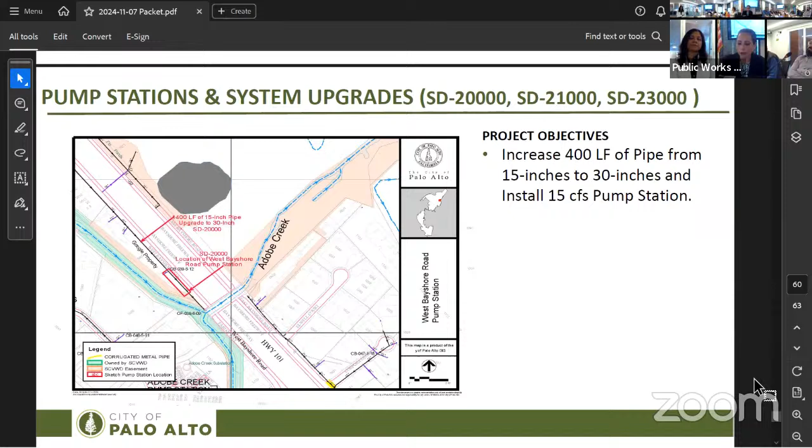Maybe next slide. So this is the other one—I think this is the one on West Bayshore. Let me see if I have one more slide that shows it. Yeah, one more slide, thank you. So this is unusual for us; it doesn't happen this often.

Oh yeah, this is the flood that would normally occur in East Bayshore. But the unusual part you see here is we completed the project—the designs were done, we advertised the project, and had 27 days of advertising, which is typical, normal for advertising a project.

We had a non-mandatory meeting with any crews that were available, any construction company eager to do this project. Only 3 firms showed up, which is fine—it wasn't required for them to show up, but we were available. At the end of that advertisement period, no bids were received, so there was no interest in this project.

We estimate about $7.5 to $8 million for the engineer's estimate in construction. It's a big enough project, but not nearly as large as what San Jose is doing or what Valley Water is doing with $60 million pump stations—we're dealing with tiny, small pump stations.

So no bids were received. That's for the first phase, the first time we solicited for bids.

We also modified the project a little bit, in the sense that East and West Bayshore right now are constrained based on access. We can only work from 9 till 4 because those are main frontage roads, and we want to make sure kids get to school on time and safely without closing down traffic.

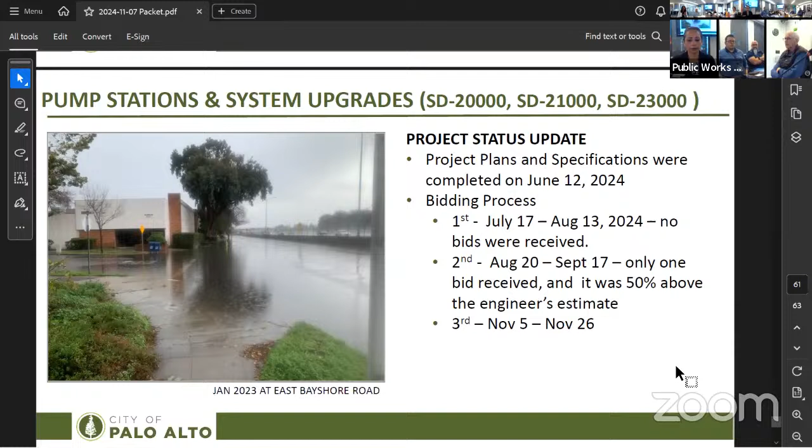It's also important to note that we have very specific solicitation rules to make sure it's competitive and fair. The way we solicit is regulated, we can't just put out any type of solicitation. We have to follow specific municipal guidelines on how to do that. It's not like Craigslist. No.

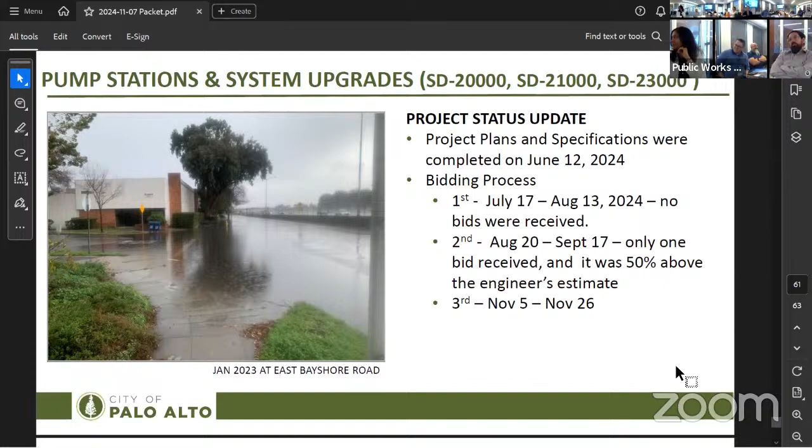Next slide. So the next project, and I think this is the first time everybody here has heard this, Ron hasn't heard it yet either. I introduced it a bit earlier in the year: Hamilton Avenue. In light of the flooding event that occurred, affecting residents off of Hamilton, Alester, and Dana, Mike's group added an extra inlet to protect them for the last winter season. We are moving Hamilton, which is one of the 13 projects, ahead of others to try to pick up some of these flows in advance of next storm events.

What we're doing in this project, from a hydraulic perspective, is building downstream and making our way upstream. So one of the next projects will be Center. Center is upstream of Hamilton, so we cannot build Center without upsizing Hamilton first. Otherwise, water will come out of the pipes and flood the streets.

On Hamilton, currently in some locations we've got 12-inch, 15-inch, 18-inch pipes built in the 50s. We're upsizing to 48-inch where possible. Downstream, closer to Rhodes, we have segments that are maybe 24-inch pipes right now. Where feasible, I'm looking to keep the 24s for redundancy since we're designed for the 10-year storm, but hoping to add more capacity. If the 24-inch pipes are reasonable, since the material, especially concrete, lasts a long time, I want to keep the 24 and put a parallel 36-inch line for added capacity. So in that sense we're maybe seeing cost savings by putting in a 36-inch pipe, but from a hydraulic perspective we actually have more capacity from the adjacent 24-inch.